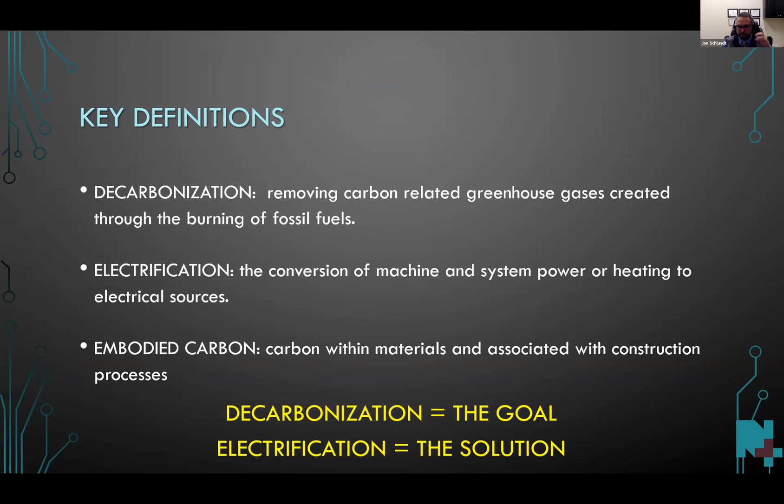So some key definitions: decarbonization is removing carbon-related greenhouse gases created through the burning of fossil fuels, whereas electrification is the conversion of machine and system power or heating to electrical sources. The other thing you're going to hear about more and more is embodied carbon, the carbon associated with the materials that are innate to the building and also produced throughout the initial construction of the project. The key thing here is that decarbonization is the goal, whereas electrification is the solution. You'll hear these words interchanged a lot, but decarbonization is the goal we're shooting for. Electrification is the solution that we're using to get to that goal.

So purpose, and I'm starting high level here. The world's population is growing. We have a lot of emissions. We have global warming. We have lots of stuff going on. Our rate of population growth might be slowing, but our overall population volume is still growing. So this is a real problem that we have to address. It was discussed initially at the 2015 Paris Agreement, which is where a lot of what we're talking about today comes from. There was a discussion about limiting the global temperature rise to 2 degrees Celsius this century. What's unique about the Paris Agreement is that they left it up to the individual countries to come up with their solutions and then reevaluate those solutions every five years.

So buildings' impact. There are a lot of carbon emissions, and buildings have a big impact in that. 40% of annual global emissions are created by new buildings. Of that, 27% is related to the operations of the building, and 13% is related to embodied carbon. We're going to focus today on the building operation side, but we really can't ignore the embodied carbon portion either.

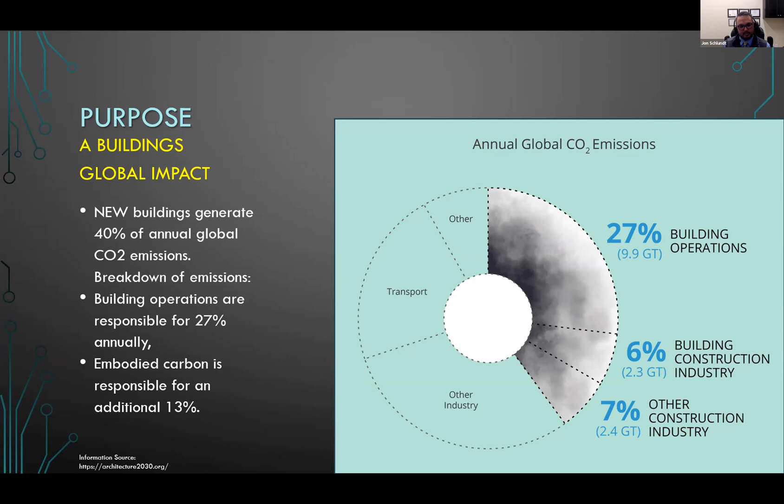Existing buildings account for 2/3 of all buildings, and will account for 2/3 of all buildings in 2040. So in that regard, a lot of what we focus on is new buildings, and as we're looking at these agreements, we can do this technology or that technology to offset the carbon emissions. But in reality, we have to address the existing built environment. Without doing so, we will not hit the goals of the Paris Agreement. This is probably one of our biggest challenges, addressing the existing built environment.

There's also, as I've discussed, a lot of rising public interest in seeing us meet these goals. Everybody sees the carbon emissions, especially in California, directly related to the wildfires and such. So people are more motivated to see improvement and change. Local AHJs are incentivizing, I've been seeing that a lot throughout the state. They're incentivizing decarbonization, or penalizing you if you don't, for compliance.

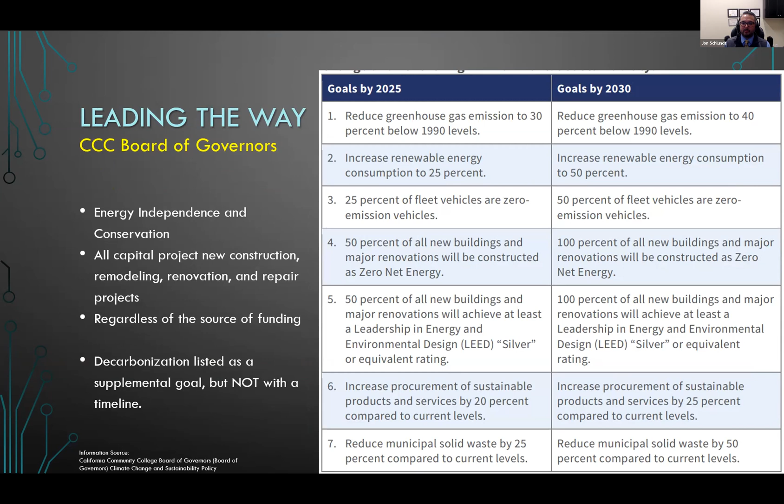But what I've seen more importantly is your own goals. These are your goals stated by the CCC. What I found most interesting is that at the same time, you have some leadership, some colleges that are even accelerating this. So, let's have 100% of our new buildings and major renovations be zero net energy by 2030. That's the stated goal. Some I've worked with are saying, let's do that by 2025, which is great. I think it's a great goal, but it brings some inherent challenges.

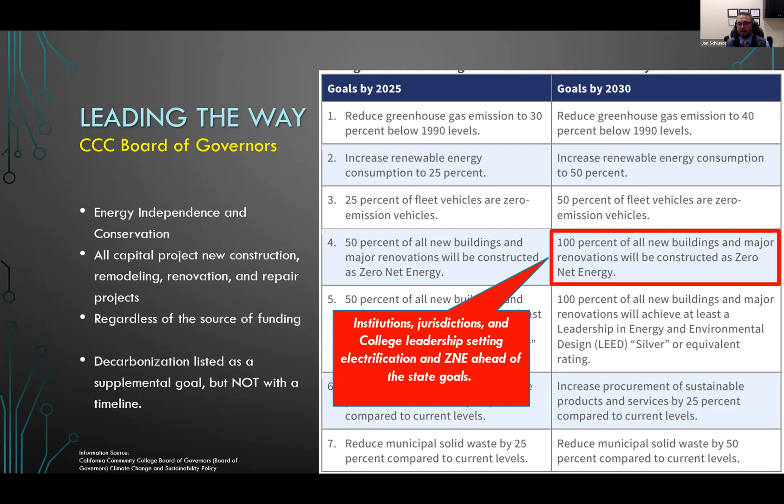There are a lot of challenges with technology. As we're shooting for these goals, technology is having to rapidly ramp up and develop. So that's been probably one of the biggest hurdles. California is leading the way in making these changes. It really started focusing on it in 2006, just as an experiment. In 2016 it renewed its interest, and in 2018 it led the global summit. In 2019, we started to see our first code requirements for solar ready.

In previous slides, I've talked about decarbonization as a goal. 2022, the code that's changing here in a few weeks, is the first time that we're seeing decarbonization as a requirement. So that's key to keep in mind. We are no longer in the goal phase. We are now in the requirement phase. What's more interesting, I think, is that 2030 is our stated goal.

So that's kind of high level. Now we're going to talk about some of the big challenges that I've seen on these projects. Some say that global warming is moving too fast for evolution to keep up, meaning the problem is too big for us to tackle, but we still have to do something. Others say California goals are too ambitious given current technology, or gas is the most efficient and cost-effective energy source. I say that all these are true. I don't dispute any of them. We have to balance everything. As engineers, we have to come at this from multiple directions. So there's plenty of obstacles, but I also see plenty of opportunities.

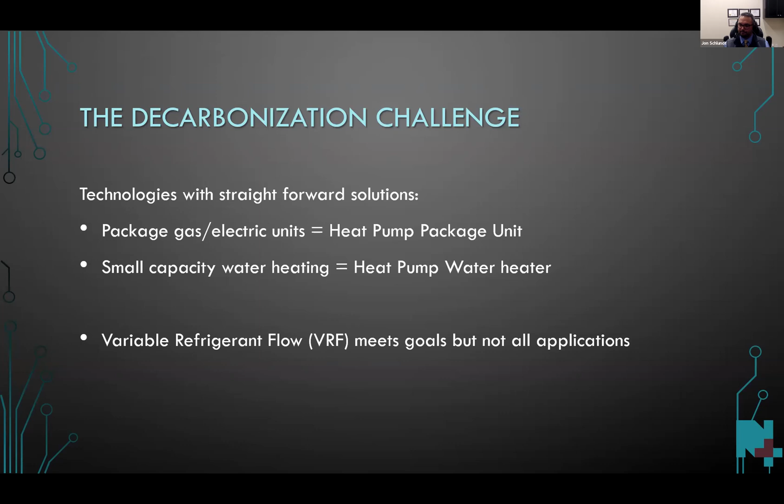So trends. Community colleges, there's growing needs for labs. There's declining lecture halls. I've been doing more projects lately that are really focused on labs, less lecture halls, especially as we go more remote with the lecture halls. So what that does in a lab setting, from a hot water standpoint, now I need to provide large volumes of hot water. They have to be available, they have to be there even just on standby mode for emergency situations.

And then in kitchens, we have high temperature minimums. So these are two critical areas that technology is trying to address right now. There's a couple options out there, but not a whole lot of them. So now we're trying to see, hey, does that one solution fit for what we have, what we need? Or do we have to come at this with a separate approach? Instead of one central heating system, go with multiple heating systems throughout a building. Those are things that we have to consider.

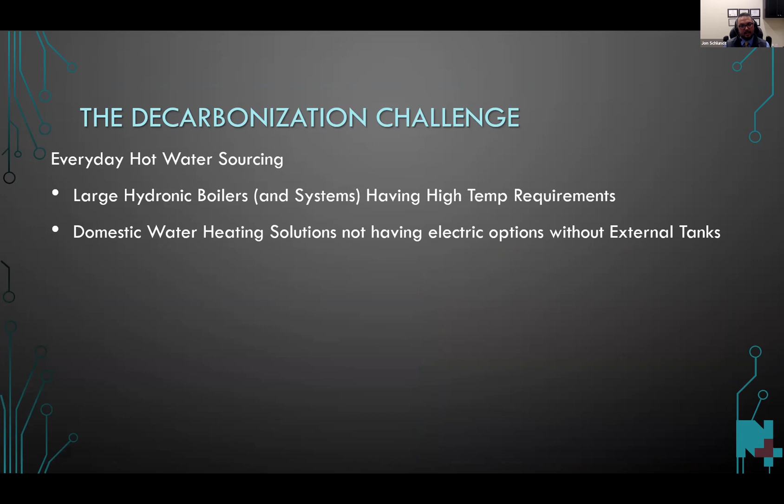Then you have everyday hot water sourcing. So you have large hydronic boilers and systems having high temp requirements. So now we're going to replace that with maybe a heat pump chiller solution, air cooled or water cooled, and maybe the temperatures can't get up as high as your boilers once had. So that's something we need to evaluate, because that is a big challenge.

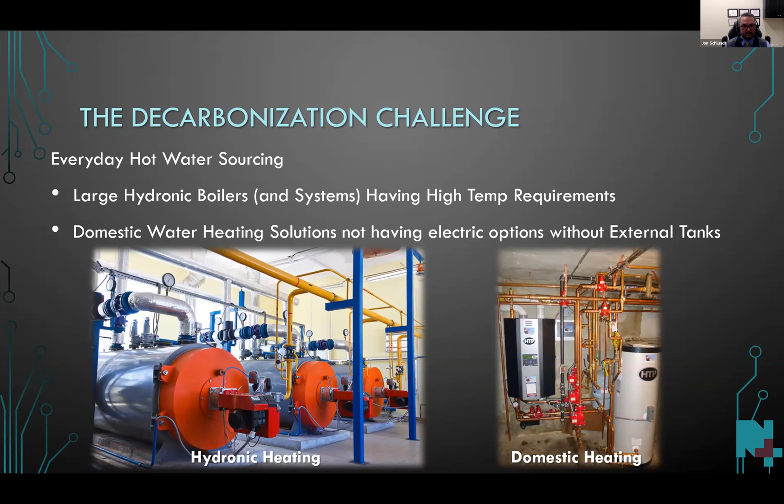Domestic water heating not having electric options without external tanks. So now you have a challenge of, hey, we had just a small little water heater. That's great. Well, now we have to have a water heater plus a tank. And so now we're having spatial constraint demands. So this is another big challenge. Really, the space is probably the biggest challenge that I see.

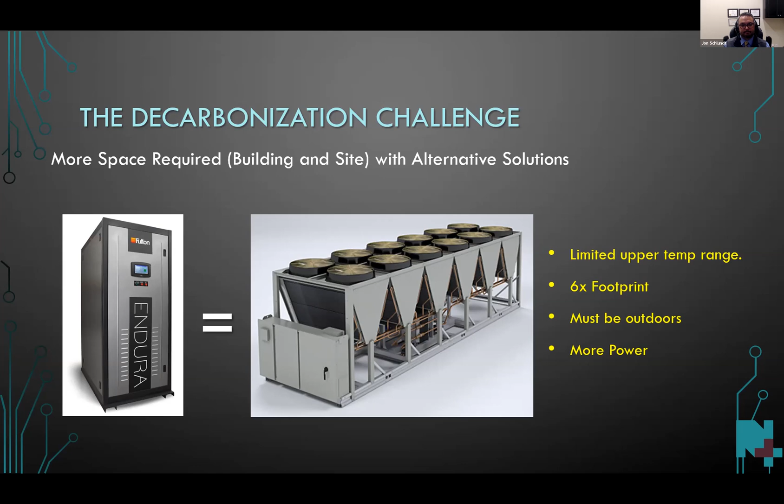So another trend that you should all be very aware of and be asking your engineers to verify, finding a sustainable design with proven technology. There's manufacturers that are out there right now that say, hey, I have this technology. I have heat pump technology. We can work this for your application. What I'm seeing is their data that they're providing is revised a couple months later, even in the middle of design. And now all of a sudden, your once compliant and solid design is no longer going to work. And it's causing redesign. If not caught early, it could cause change orders down the line.

So there's a lot of, I don't want to call it snake oil, because it's not snake oil. There's good technology out there, but it's developing quickly. So as the state is, and as we're pushing our goals up and trying to meet these demands, we just have to have both eyes wide open to make sure that we're going with a solution that can meet the requirements that is proven.

Control complexity is increasing. So a boiler system might traditionally have just a little circ pump and a couple little set temperature sensors. Now we have a lot more controls involved, and lots of flow switches and flow sensors and pumps and everything else. So yeah, we're adding complexity to our systems that maybe weren't there once before.

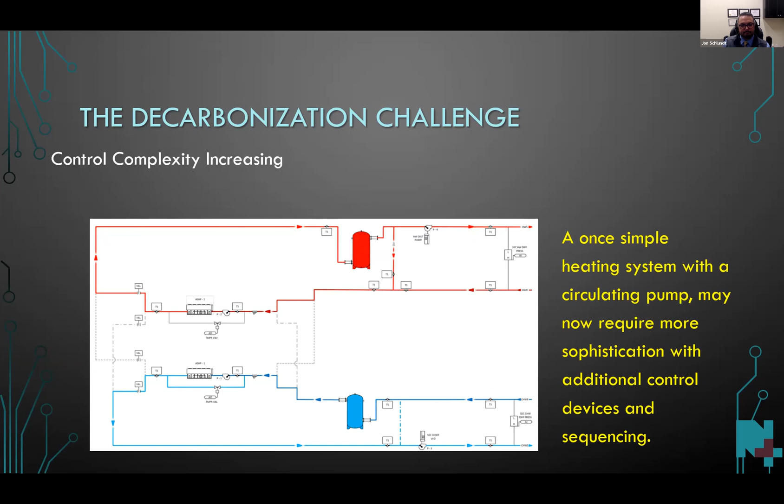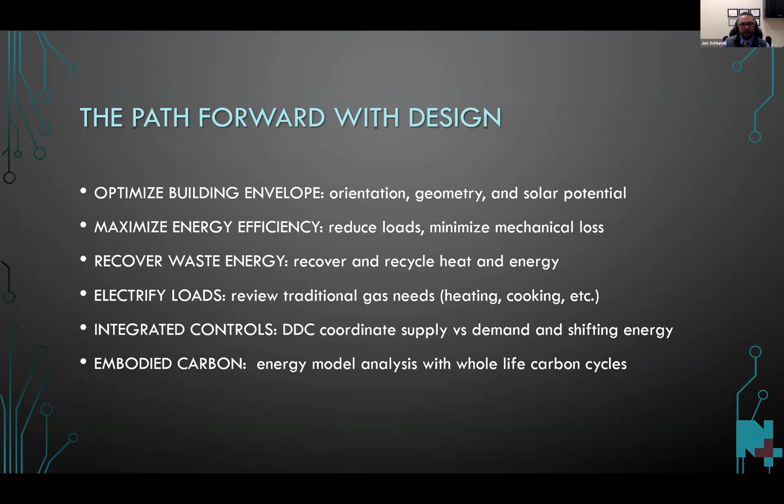So path forward with design. So we do have options, and I have a couple examples to just discuss with you. But really what we're doing when we consider these on a new project is we're optimizing the building envelope. We're maximizing energy efficiency. We're trying to recover waste energy. We're electrifying our loads, integrating controls, and then considering embodied carbon. So these are really the major things that we're looking at, especially early on in the project. So work with the architect, work with you all as owners to develop a plan to approach this project.

And this unique project is an aquatics complex. And this one has a large hot water load. So we have to keep maintaining the temperature of this pool within 1 degree to maintain its performance for competition. And so we're having to offset the boilers with air-cooled chillers, which take up a whole lot of space, as I mentioned before. So that's a big change here.

Fully integrated control. We electrified all the loads, so big electrical loads now. But what you result in is you have a big yard out here now, whereas you might have been able to put those boilers into the building before. So doable, yes, but there is some give and take.

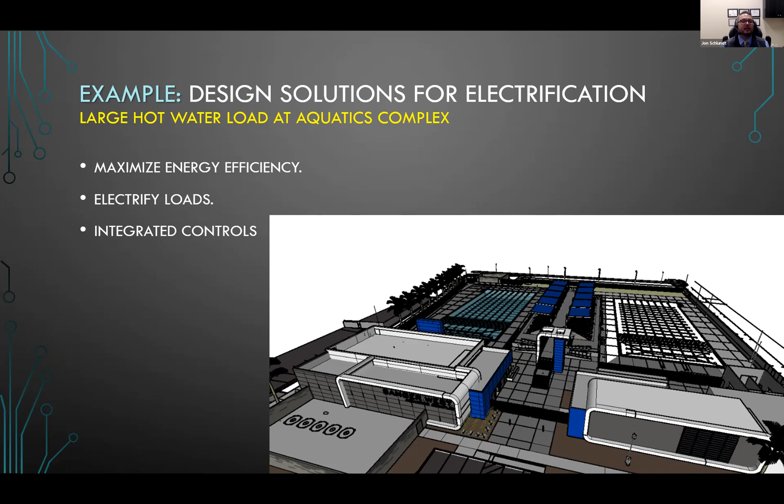Another building, so this is a lab building. So building envelope and distribution was considered early on. Try to maximize our energy efficiency. This one had a combination of air-cooled chillers, VRF, and multiple heat pumps for the boiler system, because this lab could not accommodate one big central system. So we had to go with multiple systems distributed throughout. We electrified all loads and integrated the controls as well.

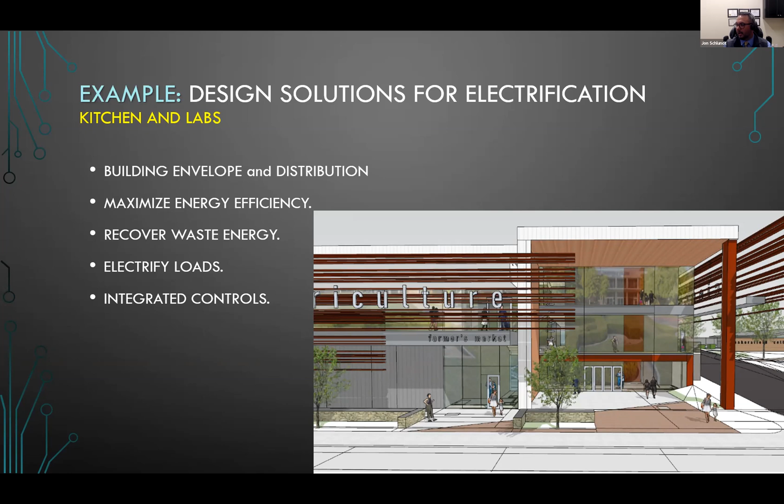So I can go into this stuff a lot. I know we're short on time, so I want to keep things moving along and switch it over to some technology solutions. Thank you, John.

Appreciate it. As John mentioned previously, over the last few years, decarb and electrification movement have been picking up steam. So during that time, we have been gathering information and feedback on challenges from individuals such as John to work on different products and system options. We'll give you a high-level overview of the products today and a possible system option with a unique funding opportunity.

Starting with our portfolio of what we call light commercial products, which includes heat pump package units and VRF systems. With our Precedent, Voyager, and Horizon lines, we increase our options, such as large tonnage options for heat pump package units to meet your needs. Trane also formed a joint venture with Mitsubishi a few years ago to provide VRF solutions. We're able to integrate traditional HVAC systems into heat pump operations utilizing the LEV kit to provide flexibility.

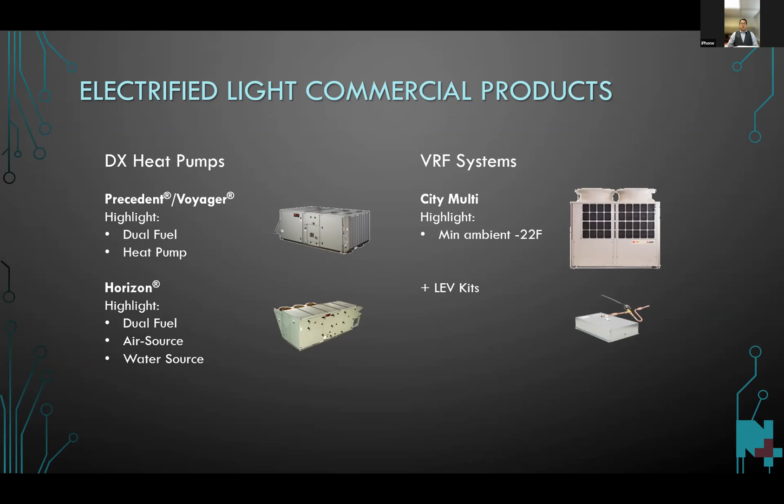Next slide, please. With the high temp hot water being another challenge, we came up with a high temp domestic heater solution utilizing the CO2 refrigerant. The outdoor unit looks very similar to the VRF systems, but instead of feeding the refrigerant into the building, we'll be providing hot water to the building.

This system can provide up to 4.52 COP based on ambient conditions and can go up to 176 supply hot water. It can operate 100% heating capacity down to 36 ambient temperature and all the way down to -13 ambient temperature with associated derate along the way. The system is modular, so it can be scalable to meet your heating needs. The system comes in a skid with associated heat exchangers, tanks, and pumps for ease of installation.

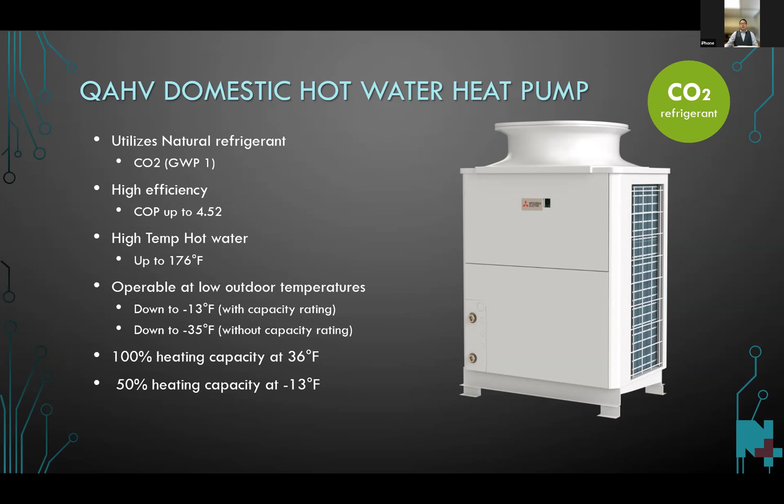The system will mostly be installed outdoors. However, it can be installed indoors with proper ventilation to provide design flexibility. Next slide, please. Now we'll go into the chiller portfolio. I think it's important to understand different operation options. As you can see, there are 4 different options provided at the bottom.

The first operation is cooling only. That's the traditional operation where everybody knows what a chiller does. It provides cooling to the space. The second operation is chiller heat recovery. In this operation, the chiller provides chilled water as a primary function, then recovers as much heat as possible. It's considered simultaneous. However, heating is dependent on the cooling load. So if there isn't a cooling load, heating is not available.

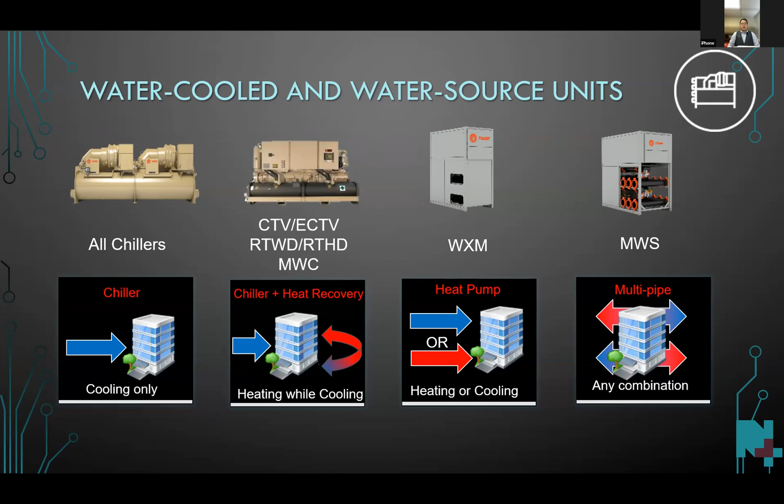The third operation is heat pump operation, where the chiller utilizes the reversing valve to operate either cooling or heating. The circuit is reversible, so the system can only provide cooling or heating at one time. The multi-pipe operation is where you can do both. You can provide cooling and heating simultaneously, where you can control the set points for both cooling and heating at the same time. The associated model numbers represented here are different product lines we have for different operations.

Next slide, please. And here are our air-cooled chiller options with the operations that I discussed previously. As you may have noticed, we are providing a couple different unit types, what we traditionally call a regular unit and a modular unit, to give flexibility on the spatial constraints you may experience. That has been mentioned previously.

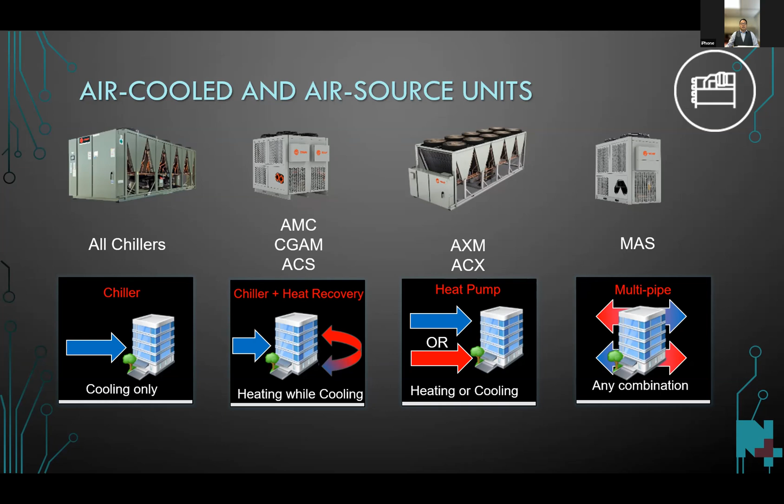Now I'll hand it over to Scott to discuss a possible system option with unique funding opportunities to offset costs of the decarb and electrification movement. Thank you, Chan. So as you looked at the two different options that Chan just shared, one thing that you can see is we are looking to have some form of a source for heat transfer.

Whether that source for heat transfer is the water source or an air source, you've got a place that you're moving heat from in an electrified system versus creating heat as you would if you were burning a fossil fuel. That's one of the key pieces to electrification. What I'm going to talk about now is a new way you might consider to look at it. It might be a way you've looked at things in the past, and that is the utilization of thermal storage.

And so, John, if we'll go to the next slide, I am going to talk about something many of you probably haven't seen. And this is the concept of using thermal storage to not only cool your facility, which many of you may have worked with or have seen over time, but what if we can use thermal energy storage as a way to also heat our facility?

So what we're showing here is a system that we call our storage source heat pump system that allows us a way to either heat our building, cool our building, or simultaneously heat and cool by having a source for heat transfer. And that source for heat transfer is that thermal energy storage, okay? And if we have excess heat transfer that needs to occur, that's going to occur outdoors. So that can occur, if you look at the top right, through our air to water heat pump, or optionally, we could be using a cooling tower to exhaust heat out of a building.

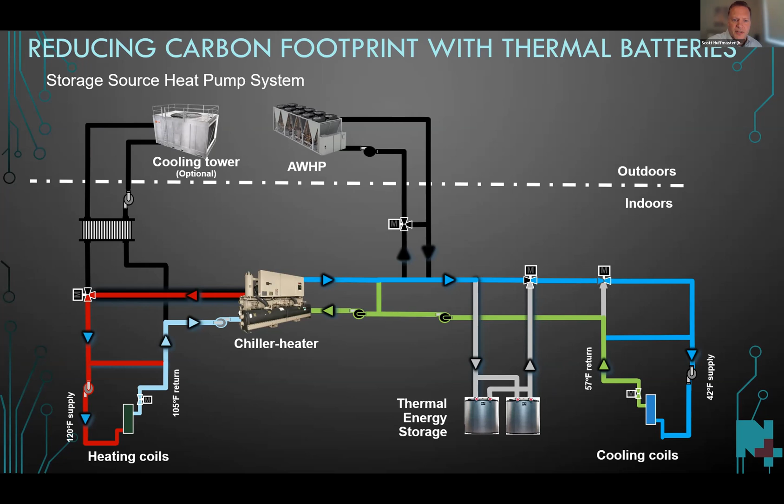So let me hit some key ideas on how this system operates now that we've seen what it looks like. So as with other electrified systems, outdoor air is that primary source of building cooling and heating. So when we need to have excess transfer of heat, we're usually using outdoor air as that source. The cooling tower provides the ability for supplemental cooling and, again, heat rejection if that's needed. The thermal storage battery now provides a way to balance the heat flow of the equipment and loads. And so you're able to store and utilize those things for later.

The air to water heat pump then can also look at seasonality and is able to cool charge when you're in a cooling dominant time of the year. So in the summertime, we can make ice at night, freeze water, and then we can use that and melt that during the day when it's optimal for either your energy rates or building operation.

The other piece here that the air to water heat pump can do that is, again, a little bit different way to think is if you're in the heating dominant time of the year. So it's wintertime and you're heating dominant and you're looking at using that thermal battery to actually heat your building. So when you build ice, you're heating your building. You can intentionally melt that ice. And so you can look at when your conditions are optimal to intentionally melt the ice and move the heat from outdoors in the wintertime.

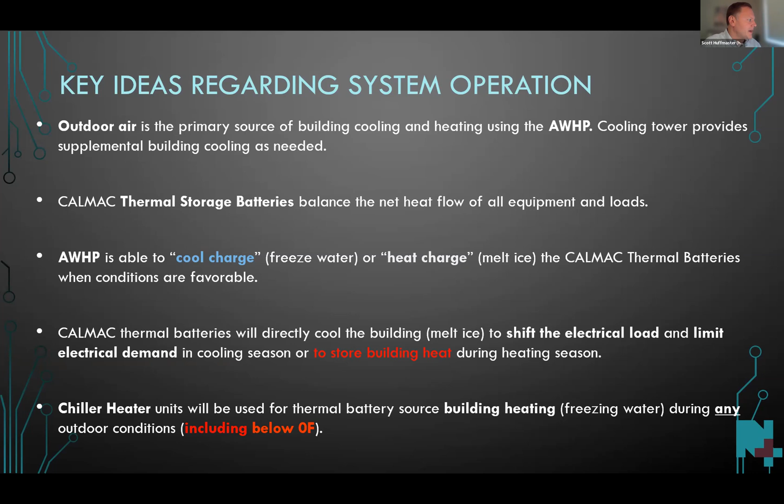So that's key system operation. Let me show you why we're bringing that up today. So if we'll go to the next slide. Typically, when you hear about a system that is more complex than what I just showed you here, the storage source heat pump, you would expect that it may cost you more. What we're showing here is an energy analysis that was done as part of an Engineers Newsletter that Trane produces to help train our industry.

This is an analysis done for an office building in Chicago, Illinois. I understand I'm talking to people in California, but again, this is content you could go see on the web if you'd like. In this analysis, what we found is that a traditional chiller with gas heat or a chiller with electric heat would be a first cost savings. Thus why we show a first cost premium to go to the storage source heat pump system.

The other thing we found is that the chiller with heat pump, what we're talking about for electrification, actually cost more first cost than this storage source heat pump system. So it's actually lower first cost than just going straight up heat pump. Here's the shift and why we're talking about new incentives.

Now that we have the Inflation Reduction Act that was passed on August 16th of 2022, the Inflation Reduction Act has provided access to a new incentive for us. It's not a new incentive overall. I'll get into details here shortly, but it's called the Investment Tax Credit under Section 48 of the Code. With that, and with this analysis, we believe we could pursue a 40% tax credit for both taxable and non-taxable, public and private entities.

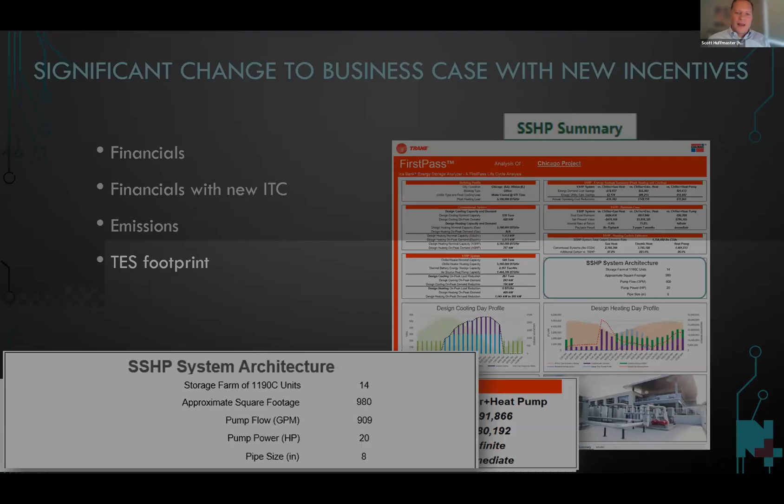All right, if we'll move to the next slide, I'm going to answer the question you might ask. Hey, you're talking about things on a grid that's not as clean as our grid here in California. Well, what we're showing here is a comparison of one of the dirtier grids in Chicago to what is the cleanest grid as of 2020 available in the United States, and that's in upstate New York.

What I will point out is you can see that consistent number. How much carbon footprint you have from a gas heating system is the exact same. We held that as constant. We didn't play a bunch of games with climates and this and that. It's, what's the heating footprint? And if I'm burning natural gas, it's going to be the same in both.

What we looked at is what is the carbon impact when I go from a dirtier grid to a clean grid? And what you'll notice is, of course, the carbon footprint drops on a cleaner grid. But the other thing you'll see that's consistent is it doesn't matter which grid we do this system on. The lowest carbon footprint solution that we found in our analysis was storage source heat pump.

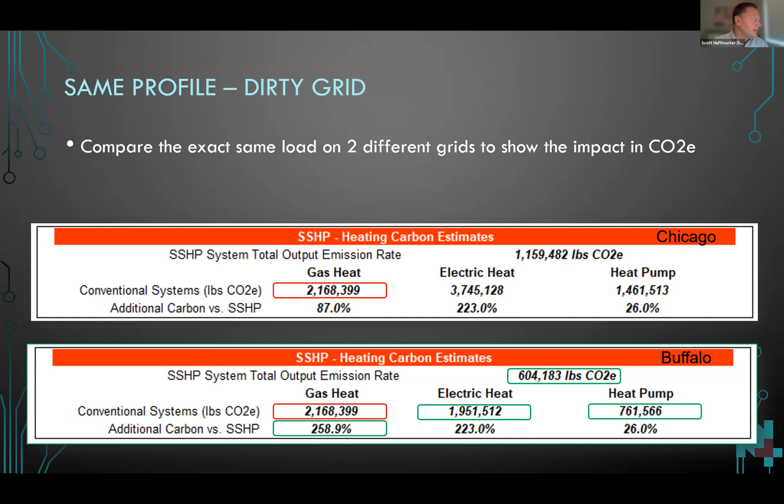All right, so I talked about how incentives play into this. Decarb and federal stimulus are 2 things that have now come together. You've been dealing with this in California and the push for this, but now it's happening at a federal level.

Inflation Reduction Act, I hit that a moment ago. What is the goal for this? What is being targeted? Here you're seeing what came out from the US Department of Energy, what came out from the White House. The target, and one of the things that was meant to be addressed in this legislation, is a 40% reduction in greenhouse gas emissions from the entire United States by 2030.

That is considerable. You heard earlier from John that 40% of our emissions comes from our buildings, right? And so if I'm going to remove 40% from the United States and buildings do 40% of it, we have to address not just new construction, but also the built environment. And guess what? You can't do that without money to do it.

So if we'll go to the next slide, what I want to call out is there is a tremendous amount of dollars in this bill to address, but the one that gets missed the most: the 30.5 billion, the 30 billion, the 3.4 billion, the $1 billion for grants, the 50 million for air pollution in schools, all of those numbers are specifically called out in the bill. You can look up the numbers.

What is not specifically called out is how much incentive is out there to focus on tax incentives for the commercial industry. And the Congressional Budget Office estimated the incentive values of the tax incentives in this bill to be at $216 billion. So the biggest piece of this bill is in tax incentives. So I know many of you don't have tax exposure directly. So let me talk about how these tax incentives can matter for community colleges.

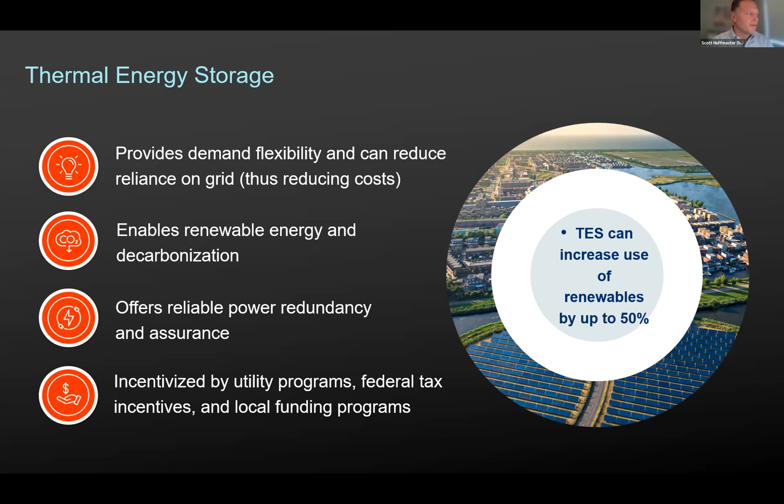Also enables renewable energy and decarbonization through maximizing when we buy off a grid. So if you historically know how your grid is performing, you can buy off the grid when you're seeing the most amount of renewables. Offers this redundancy, right? If a piece of equipment goes down, but you have an ice tank in place, for instance, you've got cooling already built for you, whether or not your compressor is running. And last but not least, that incentive has really changed the game on the interest in this system.

So I'll summarize here the overall presentation, and then we'll be open for questions. Here at Trane, and likely with you, we're seeing decarbonization initiatives grow exponentially. I'm having presentations on this 5 to 10 times a week. I mean, the interest is huge. We know that reducing carbon emissions is going to change our thinking, change how we design our systems, change how we decide what systems make sense for our building.

For us here at Trane, we're putting huge investments into growing our offerings for electrification, heating, teaching our people how to design heating systems, not just cooling systems, how to design energy recovery. And last but not least, with this recent legislation, the Inflation Reduction Act, there's now unique opportunities to really rethink the inclusion of things like thermal energy storage into our designs.

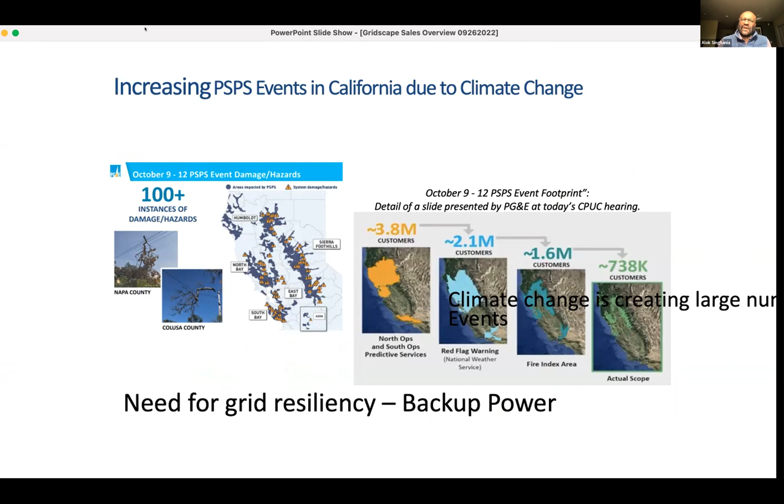And that's primarily because our grid is still fairly old style. It's a relatively one-way flow. You have a whole bunch of power plants all over, and you have transmission lines and distribution lines, and that's how you're getting your electricity for the most part. But as we know, if we continue with that model, it's going to be very, very difficult to meet the demands. Central power plants are very expensive to build, and on top of that, we cannot build enough of them because the cost is going to be really high.

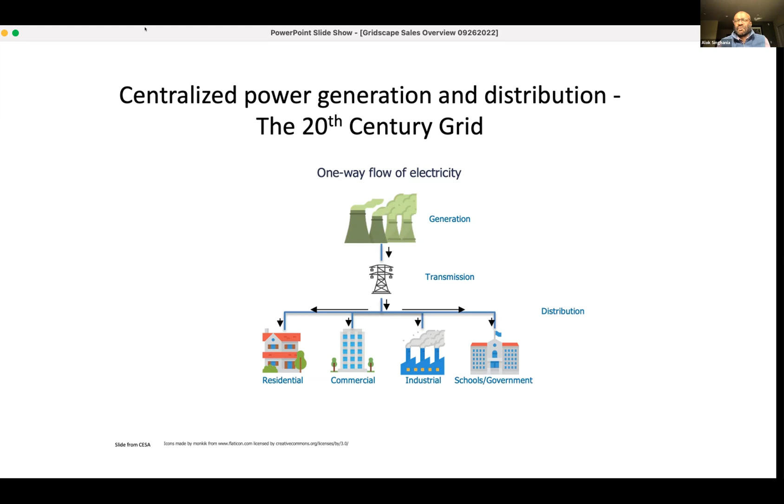So a new model is really a distributed power system. A lot of you are also familiar with it. Essentially, what it means is that you can generate power anywhere and you can use power anywhere. And that really is a distributed system. And we have a lot of experience with distributed systems. If you really think about it, computers went through distributed systems from mainframe to where we are today. The telecom companies went from more of a centralized system to a distributed system today. So we have a lot of experience in how to transition from a centralized system to a distributed system.

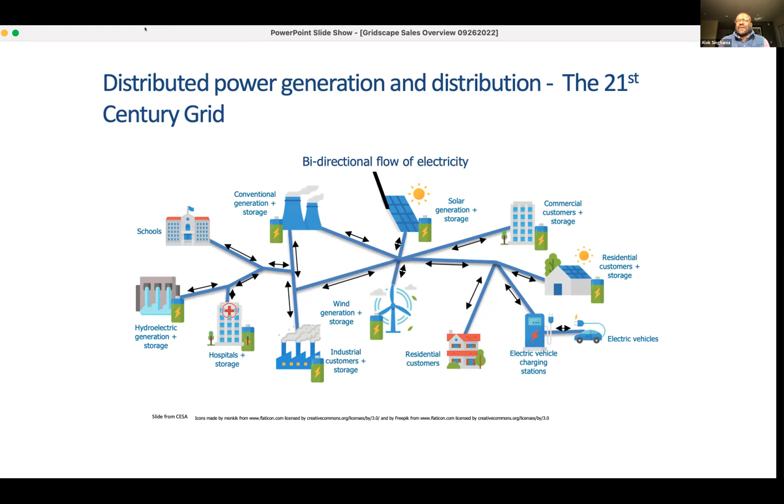And one of the reasons why we can do that on the energy side is that for the last 10, 15 years, we now have the ability to produce energy at local sites. We did not have that in an efficient, cost-effective manner. Now that we can do that, it becomes easier to have power generation anywhere you want, and then combine it in some unique way to redo the grid.

And so essentially, the point ultimately is that electricity demand is going to continue to go up. Grid resiliency is going to become a challenge because of all the climate changes. We have all sorts of emission standards that we're trying to meet for eliminating fossil fuel. And if you do all of that, the only way to meet that demand would be to adopt distributed energy resources, or local power plants, as we're calling it.

And another big advantage of that is you do not have a single point of failure, primarily because now your power is generated in a bunch of places, thousands of places, maybe even millions of places. And therefore you do not depend on a single power plant or single distribution line or transmission line.

And depending on how the technology is used, I can see a time when we literally have millions of these distributed energy resources throughout the state connected in a very unique way. So if you have one part of the state that cannot get energy because the central power plant is down, it can come from somewhere else. So there are lots of very, very interesting things that are happening in the state in distributed energy resources.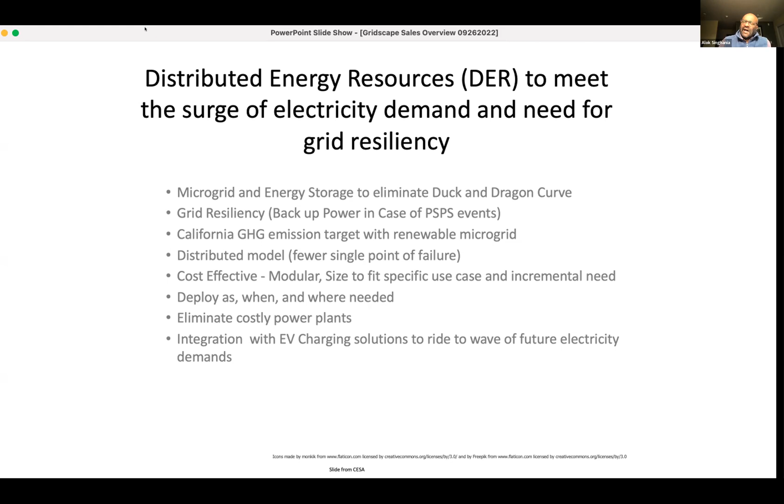So essentially what it really is at a high level, you have a need for making sure that you have power available all the time. You have a need to make sure that your power is cost effective. You have a need to make sure that the power is clean power. And if you take all of those into account, then the solution is to really try to figure out how you can adapt renewable energy microgrids for your local need.

Now, we're talking here about solar, but there is really nothing in the technology that says that you cannot have solar, you cannot have wind, or you cannot have geothermal, or you can combine them in some unique way to do all of these things. The ultimate goal is: can I meet my requirements for my electricity needs by producing energy locally? And can I use energy storage in a unique way so that when the renewable energy is not available all the time, I still have access to that renewable energy? And that really is the point in all of these renewable energy microgrids that we talk about.

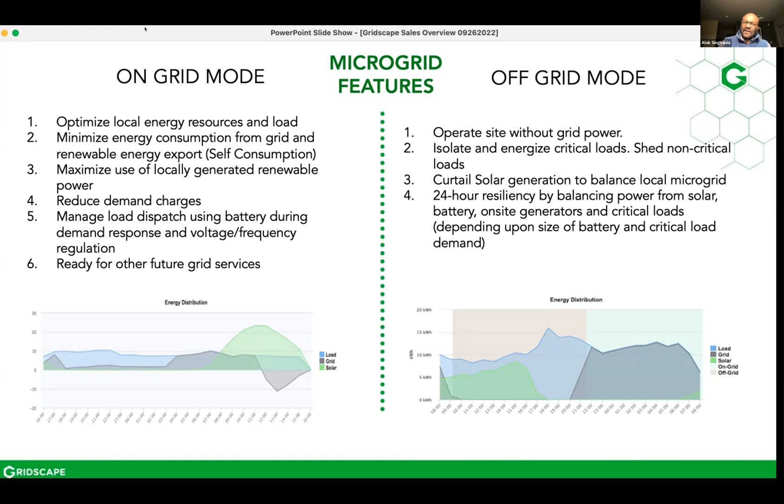And once you have that, as far as you're concerned, it doesn't matter whether you're getting the power from the microgrid or from the grid, in case the microgrid doesn't have anything left in it, or some combination of that; your system should run just as is. So this system really strictly is an add-on system that shouldn't affect any of your operations anywhere. And that's the idea. So what is Gridscape?

The very first one that we did was about 5-6 years ago, 3 microgrids for Fremont fire stations. And since then we have done, or we are in the process of doing, at least 30 to 35 of these renewable energy microgrids in California. This is a quick snapshot of what we're doing in terms of microgrids. We're doing 8 microgrids for the City of San Diego.

Again, the reason why I mention all of this is because it kind of gives you an idea of where microgrids can be used. These are smaller sites ranging from fire stations to police stations to community centers, and there are 8 of them.

We're doing a campus-wide microgrid for Chabot College here in Hayward. They had an existing solar canopy of a little over 1 megawatt, and we're putting a 3 megawatt hour microgrid battery storage system to take advantage of some of the energy that's produced by the solar, as well as to provide resiliency. We're also doing a campus-wide microgrid for San Jose City College.

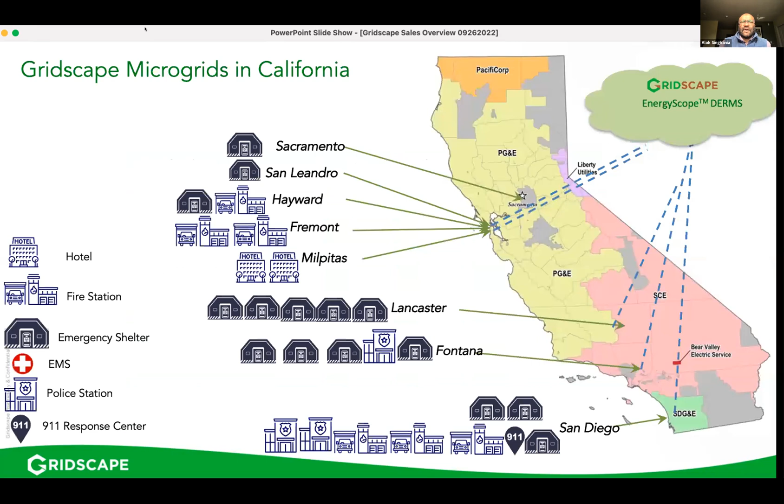And I have a few more slides at the end to give you a little bit more details. And again, we're doing something very similar for City of Fontana. We just finished a community microgrid for San Pasqual Band of Mission Indians in San Diego. This is again connecting several buildings and running their entire government facilities through these microgrids. And we have done a whole bunch of hotels and a few other sites; I'm going to skip that. This is an example of what our product looks like.

We are one of the first ones to build what is called an integrated system. Microgrids traditionally have been very, very complex to develop and deploy, primarily because they are project-based. That means you figure out what your size would be, and then you hire an engineering firm. They get different components from everywhere, and then they try to put it all together on site.

And that, from our perspective, adds high cost and high uncertainty, primarily because if the people who are doing the integration work are not completely familiar with your setup or some of the unique structures you have at your campus, things might not work. So we have taken an approach where we're building these microgrids in factories. That means every single microgrid that we deploy looks exactly the same.

And the reason why we did that is because we see these microgrids being deployed at literally hundreds of thousands of sites throughout the state and throughout the US. And if we were to do that, then we have to get to a point where these are really coming off of an assembly line as opposed to being built by hand every single time. I'm not going to go into too much detail because that's not terribly relevant at this point. But the difference really is it's a product assembly based system that makes everything more predictable because every instance looks exactly the same.

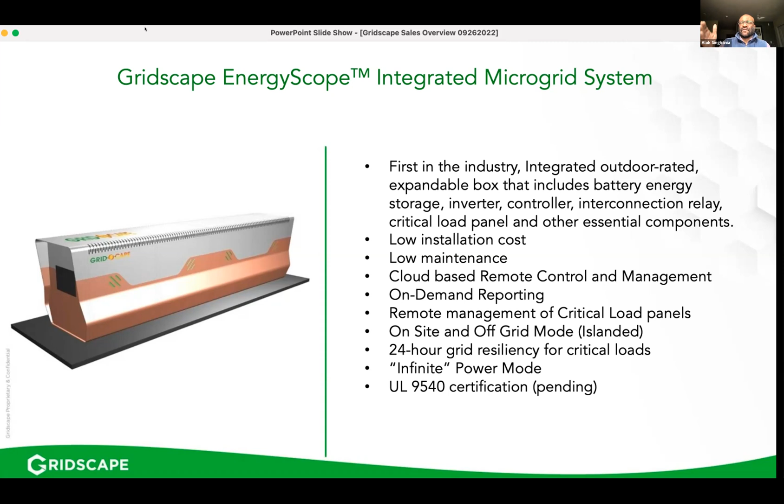This is an example of some of the software that we have. If you have ever dealt with utilities, you know how difficult it is to get information easily on an hour-to-hour basis. The way we have designed the system, you would have complete control and complete information on what's going on in the system, how much energy is being produced by your solar or renewable energy system, how much is in the battery, how much you're using at this point, how much you are likely to use, how much you have saved in terms of GHG emissions.

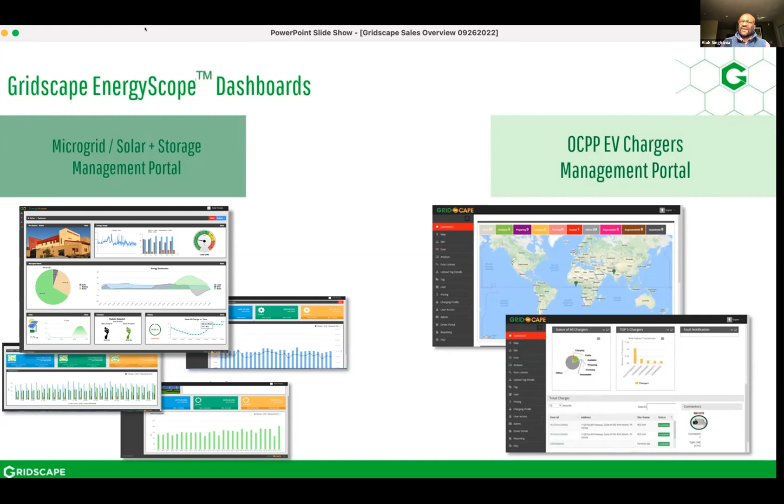All that information is right at your fingertips, primarily because a lot of what we do is software driven and all this information is easily available. Again, I talked a little bit about it. It's a Gridscape differentiator, but as you start to think about these microgrids for your campus, think about all of these points as something that should become part of the requirements, whether Gridscape does it or someone else does it, that's not important.

So the first point is that you want a product-centric approach, primarily because you want every instance of what you're deploying to have been tested and working somewhere else. And that can only happen if it's an assembly line product. In our case, these manufactured products scale from 75 kilowatt hours up to 9, 10 megawatt hour systems.

And I want to point out here one of the comments that came out on the DSA. Fred, Ron, Gridscape and a whole bunch of other people have been talking with Craig Rush's team at DSA in San Diego to figure out the best way to get DSA to issue permits for these batteries. These batteries are quite large and they're heavy.

And currently there is no simple solution that says, if you have this, DSA will approve that. In fact, we have gone back and forth several times and we've been told that some of the installation that has already been done may not really qualify for permitting today, primarily because the DSA has learned a lot more. And so what we're doing, we're working with Craig Rush's team, Fred and Ron and a whole bunch of other people to come up with a standardized, simple way to get DSA to approve these battery storage systems so they can be deployed easily.

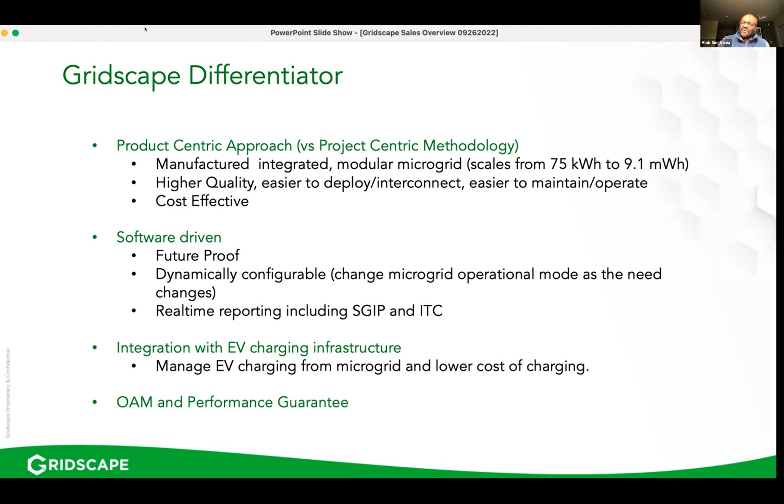The other important thing is EV charging infrastructure. One of the things we're doing at San Jose City College, for example, we're putting about 35 charging stations for the usage of staff and students and perhaps even communities around the campus. And you want to be able to manage this EV charging infrastructure through the system, because at the end of the day, a load is a load of electricity. And as long as you're using electricity, you should be able to use the system to take care of that.

This is a mobile microgrid system that we're building. This is in case you have built a certain system and you have a power failure event that's going to last longer than what the system was designed for. The technologies are coming in where you can bring in mobile battery systems and attach them to your campus to provide you with additional resiliency in case of extended power failure.

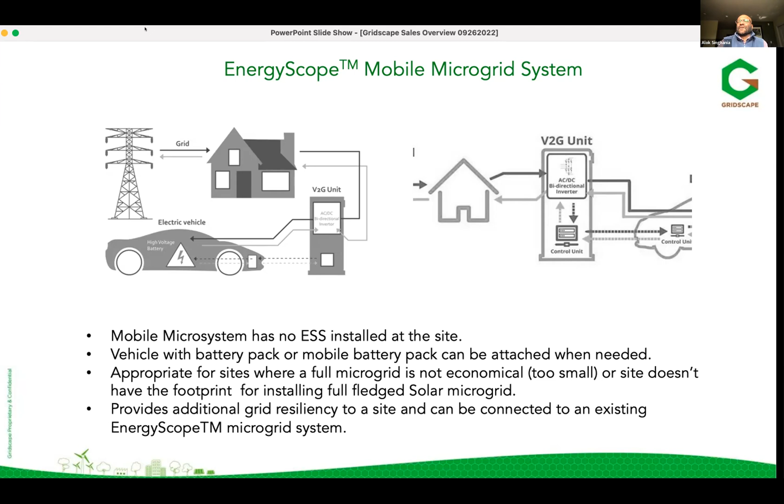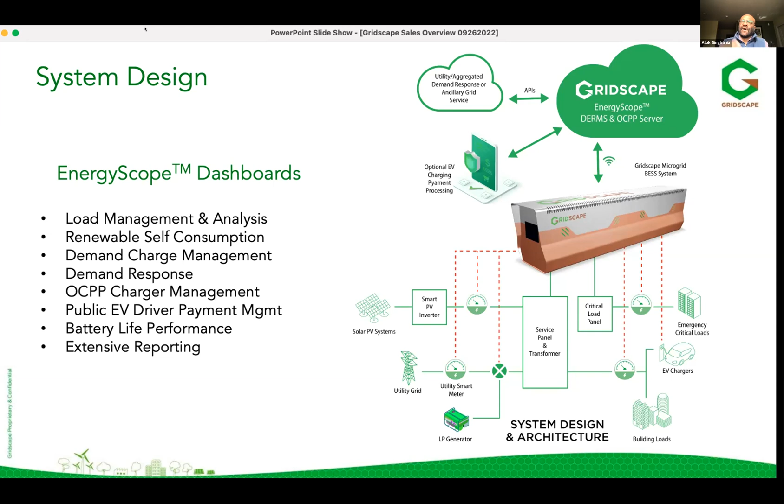Again, I'm not going to get too much into it. What it's really showing is you have a local power generation source, you have a battery installation, you have microcontrollers, and they are connected to each other. And ultimately, they are connected to the utility and the service panel that you have to take care of all your energy needs.

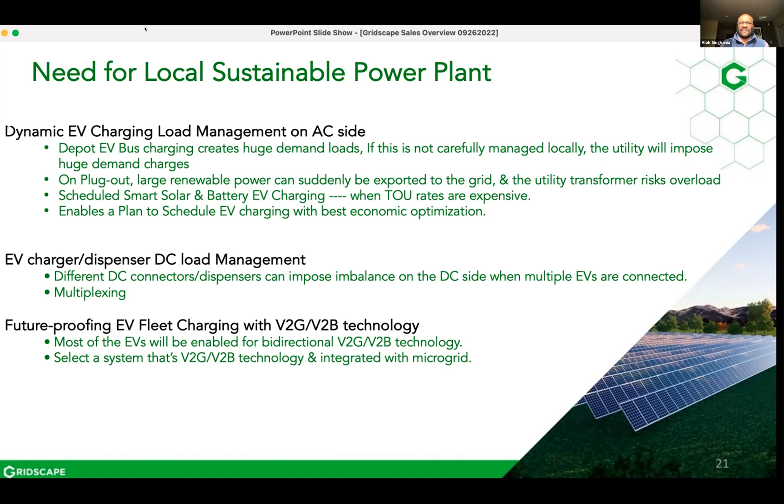Not getting too much into it because that's not what you do, but in case you have a fleet and you want to take care of those fleet charging stations, they are quite complex, especially when it comes to medium and heavy duty vehicles. And you want to make sure that whatever microgrid you're putting in can take care of that as part of the overall system. What you don't want is two separate systems, one for your site and one for your EV charging needs. That makes no sense. So you want to be able to combine them.

Quickly on a project, what we're doing at the San Jose City College is we're getting a solar offset of about 25-26%. Primarily, it's because the energy needs of a college campus change. So you can design something that does 100% solar, but on the other hand, you'll probably be producing a lot of energy during the summertime when the college campus is not used to its full extent. So we try to use some mechanism to figure out what is the most optimal size.

And again, this will depend on, I know some of you in the audience here have done an RFP for 100% solar offset, and that's perfectly reasonable. The San Jose City College did it at about 26%. And so it's going to have about 2.6 megawatt hour of a battery system, and then it'll have our control system, and we'll have 36 charging stations, including V2G chargers, fast chargers, and level 2 chargers.

And what we're going to do is, currently there's a 12 kV loop that runs throughout the campus, and we will update some of the switches to make them software driven. Therefore, we'll have the ability to island some of the buildings. So again, this system is not designed to run the entire campus in case there is a power failure, primarily because you can certainly do that, but then that reduces the amount of time that you can run on backup power, because there's sort of a limit to how much battery energy system you want to install from a cost perspective.

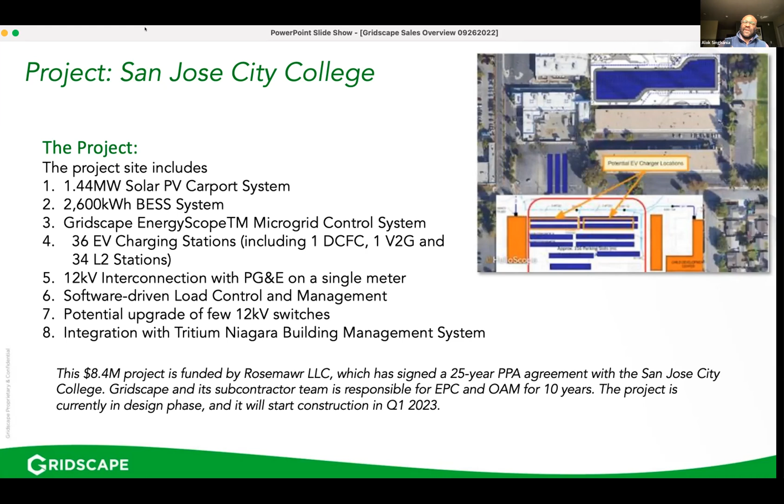And if you really think about it, San Jose City College's blended cost is approximately 28 cents today, or 26 cents today, and that will continue to rise because PG&E escalation is relatively high. And here you have predictability as to how much it's going to increase. It's going to increase 2% every year. And therefore, over the life of the system, San Jose City College will save about $10 or $12 million. And again, saving money, as well as providing renewable energy, providing charging infrastructure, and not having any other effect on your system are sort of the goals of a local power plant or a renewable microgrid system.

This one was possible because of some of the uniqueness that Chabot College has. Every college has a slightly different infrastructure, but these would be sort of the basic infrastructure. You have the renewable energy microgrid, solar or some other renewable energy source, energy storage, control systems, charging stations, and some sort of a loop that's powering the entire campus, and we replace some of those switches to make them more software driven.

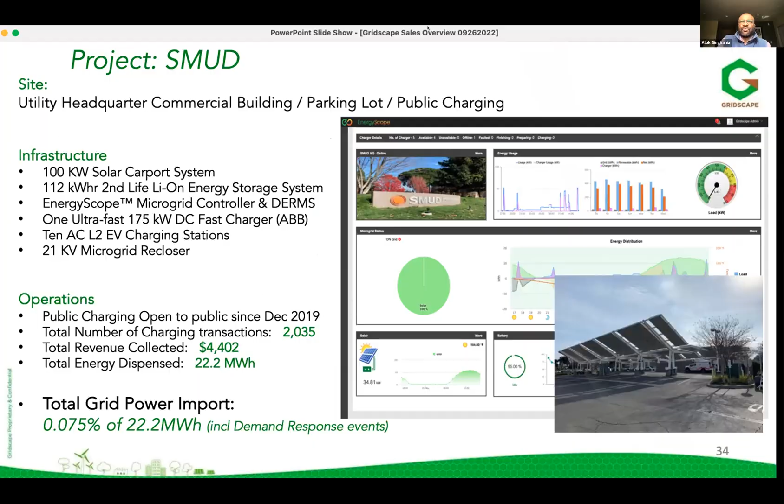Alok, you've done an awesome job. I just have one question for you, and it's in regard to the issues that we're working through with Craig and the Division of the State Architect. Primarily in those discussions, there's the seismic component for the structural dynamics of the enclosure that would actually house the battery system. And then the other issue is in regard to the fire and life safety. So with that being said, being that the lithium iron phosphate batteries are the primary load center for storing the potential energy, the big issue for DSA is the fire safety.

And going back to an example that they presented was the failure that they had up at one of the PG&E plants. Right. Can you tell us, how far have the batteries gone as far as the technology? How have they improved? Because in the past they've had issues with fires, them blowing up or whatever. How is that right now with the current technology? Good question. So I think there are some new regulations that have come in, and there are some new regulations that are coming in 2023. So there are several different answers.

First of all, most of the blowing up of the batteries and so on that you're seeing tends to be the NMC batteries, not the LFP batteries, because LFP batteries tend to have slightly lower thermal runaway. They are not as prone to heating up, which is really what causes the fire. The other thing is, a lot of these installations that have sort of blown up in the past did not have fire suppression, didn't have gas detection, didn't have proper ventilation because we didn't know enough about those. Now we have a much better understanding of all.

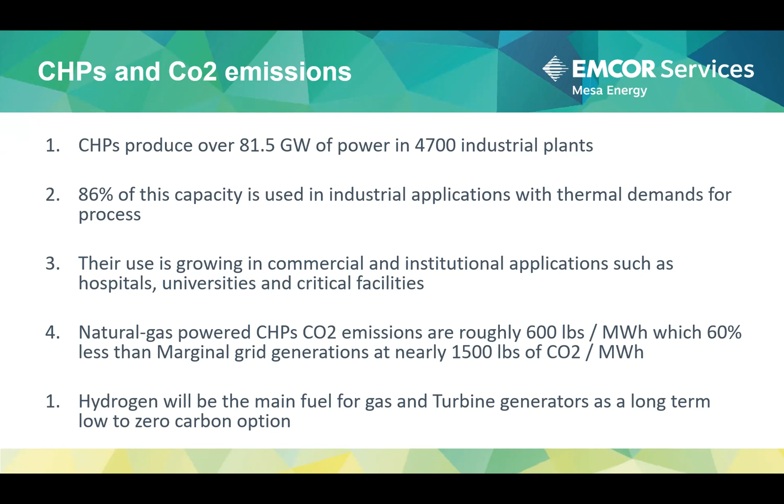So you'll have to excuse me, because I don't know what the next slide is, because I just kind of put these together. But I wanted to go back to the

utility. Those of us in California know what's become of the utility. The distribution infrastructure is a concern. All of you that have had to deal with the fires from the north all the way down to Southern California and even the San Diego area, we've all had to deal with the fires, and that to a large extent was attributed to wind events that have led to downed power lines causing fires. There are, I believe, multiple lawsuits going on at different stages, but we know that has been a

problem. We know that power quality issues have been a problem. I talked about that earlier. It affects sensitive electronic equipment, like the chillers and any equipment that is VSD driven, whether it's your pumps, your chillers, or cooling tower fans or other things, even data centers. The power quality affects all of that, and it shortens the service life of the equipment.